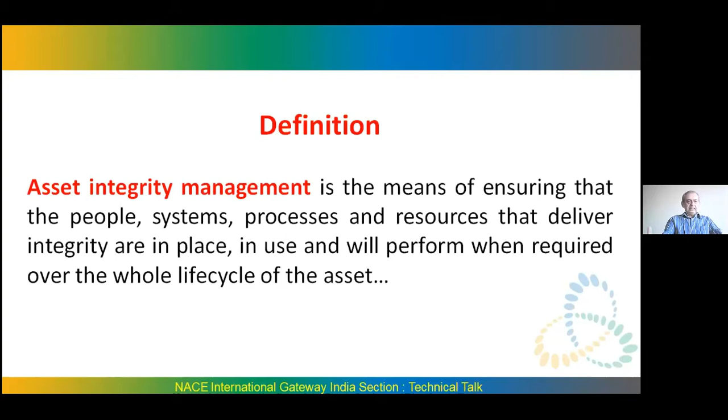Asset integrity has three constituents: design integrity, operational integrity, and technical integrity. What is design integrity? Design integrity is the basic conception of the asset, how the asset is going to be, what will be the capacity of the asset, what will be the metallurgy, what will be the protection, the HAZOP, HAZAN, HAZID, LOPA study, HIRA, then cathodic protection, corrosion protection. All those things are perceived and designed well, so that the asset performs its given role over its life cycle.

So I would say that a good design gives you a 60 to 70% guarantee that the asset is going to act as per the plan, as per the basic conception. And construction is also one aspect which I take in the design only, because it is the practical implementation of the conception which has been designed, which has been thought. So construction integrity, construction strictness, construction quality make a lot of impact on the asset integrity over its life cycle.

Let me introduce you to the regulation part in our country, how things are at the moment. This is a typical IMS, integrity management system regulation of the country for the city gas distribution system. So you can see various schedules from 1 to 9. It talks of

hardware aspects. In Schedule 10, care has been given to adequacy of manpower positioned at various stages of the project. So minimum qualification, experience, those things are prescribed, and with that backup of competence, the people are placed in those workstations, and they are supposed to perform their duties.

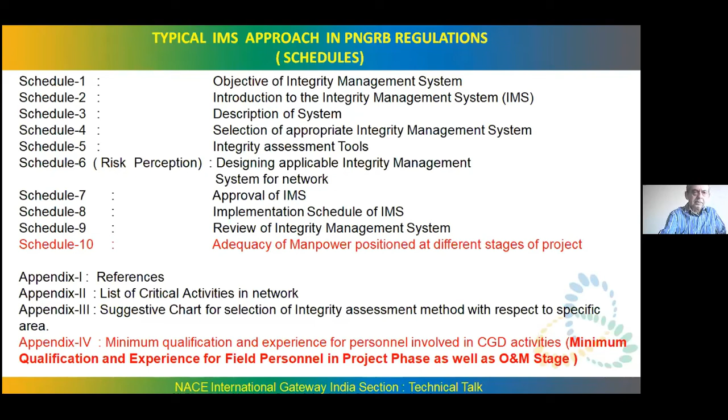Ultimately, the brass tack of the whole issue is the man behind the machine. The machine is given all the wherewithal to operate. But how are the machines getting operated, are they being used or abused? That is the thing which I am going to talk about today, basically.

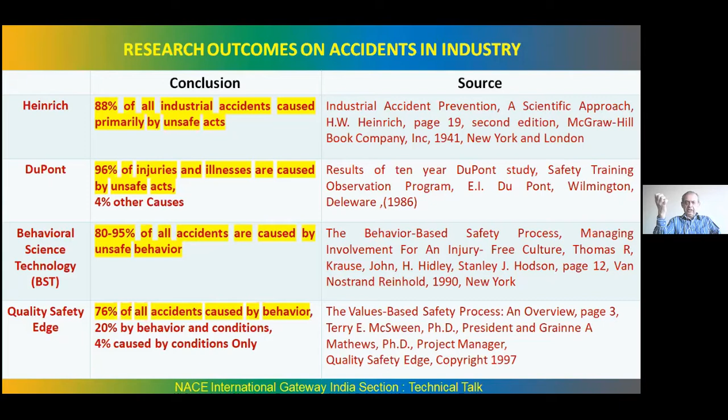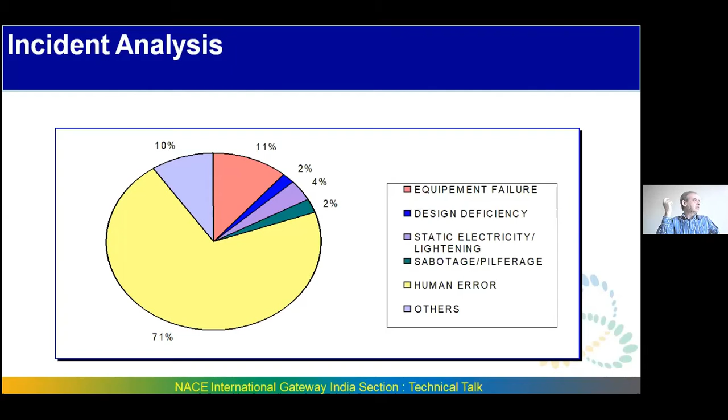This is the slide which I chose from my OISD days. It's a very self-explanatory slide. It talks of human errors by 71%, then equipment failure, design deficiency, static electricity, lightning, sabotage, pilferage, human error, others. So mostly the emphasis is on the human that operates the machine or that has to take care of the asset integrity assurance.

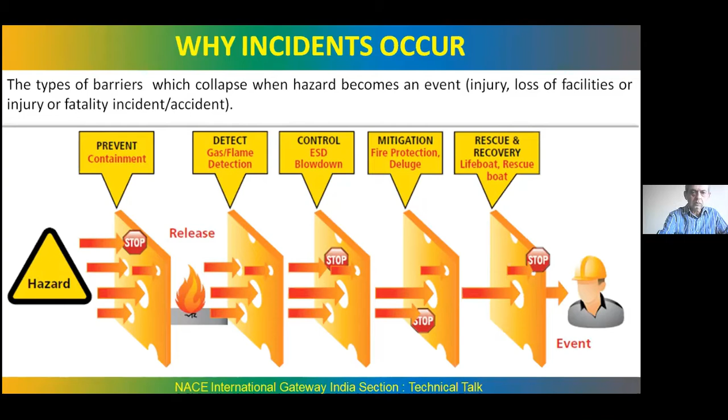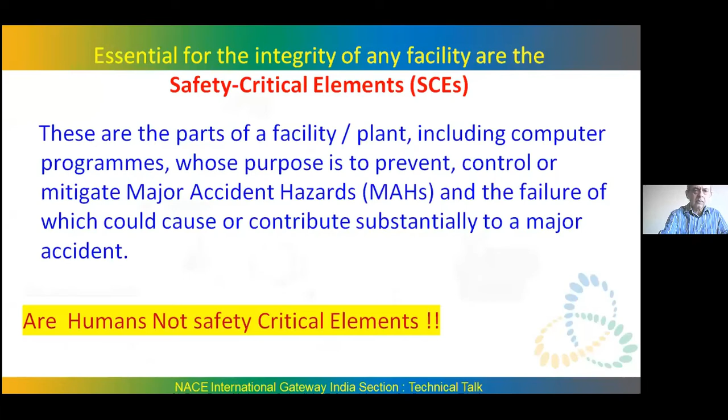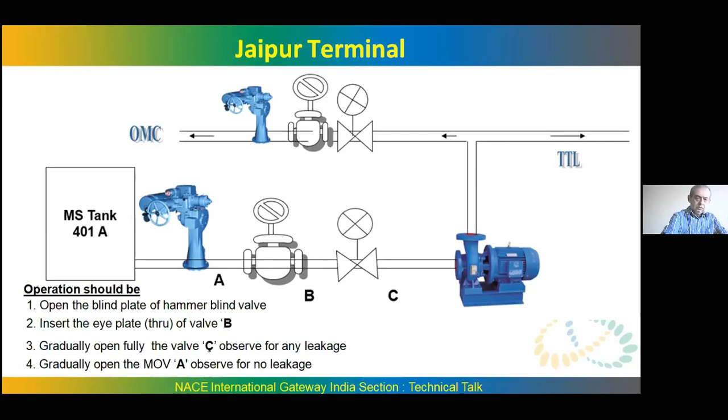What happened? Loss of primary containment of motor spirit means there was a leakage from the tank itself, with the vapor cloud going out of that area, that secondary containment. These are the barriers which I am talking about. These were the barriers created. Like I showed in the slide, the barriers are placed. So barriers start breaking. How were the barriers breaking? These are the explanation. Then incapacitated operating personnel, inadequate mitigation measures.

There was no water or PPEs or tools and tackles. People were going with the tools and tackles to do something, but there was a probability of some spark and explosion. So the situation was left as it is. Then approach of operating personnel became difficult due to rapid increase of vapor cloud, improper tools and tackles, fear of fire. The scenario went unabated, and after 45 minutes, there was a fire engulfing the whole depot.

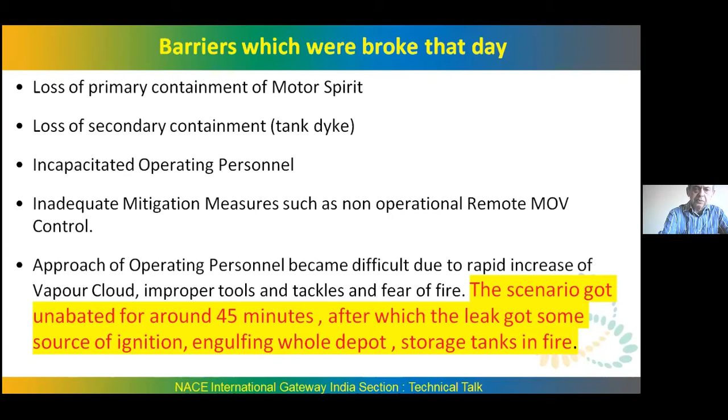Now this is the scenario of the plant. All floating roof tanks of the depot caught fire. There is a peculiar situation in a fuel depot that when the fire takes place, all the floating roof tanks catch fire simultaneously, because that seal area is a containment area. The vapor cloud tries to settle on that area. And the moment there is some ignition, some spark, some fire, all the tanks catch fire.

So fire spread to all tanks and raged for 11 days. Management had taken a considered decision to allow the petroleum product to burn, because whoever was going was unable to do anything practically because of the heat intensity. So product consumed was 60,000 KL. Total installation destroyed. 11 lives lost, and several others injured.

Collateral damage. There was a car dealer whose whole showroom was damaged. The pump house for the trunk crude pipeline was also damaged, and this handicap reduced the throughput of two major oil refineries. It took 18 months to rebuild the facilities on a war scale. The total loss was around $65 million.

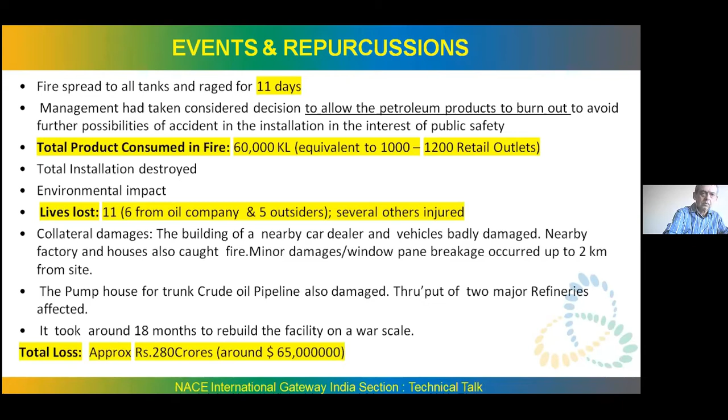In the beginning, there was a video shown on Piper Alpha, the Piper Alpha incident in which 167 casualties had taken place. What I am going to show is why it happened. What was the human intervention in the Piper Alpha incident? We only see the fire. But why does the fire occur as such? What is the basic cause? So I'm going to get you into a small video which shows what happened exactly in the Piper Alpha incident.

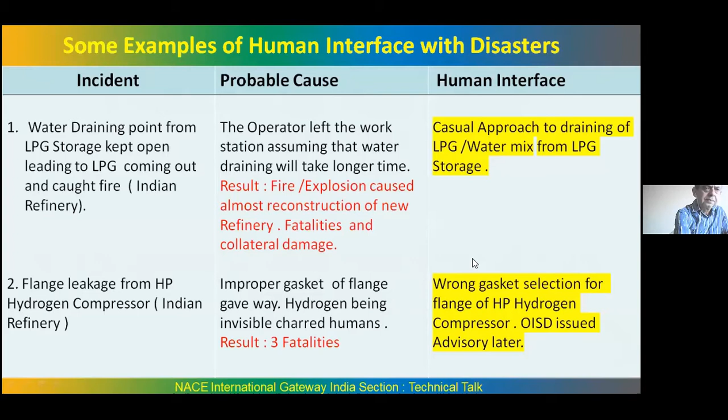So you can share the screen once again, because your video will be in the folder, I believe. So you can press escape. And you can go to the video. Yeah.

Immediately after the explosion of the Piper Alpha, it became imperative that the cause of the accident be uncovered quickly. Britain's oil production was dangerously reduced, and the chance of another rig suffering a similar disaster meant speed was of the essence. Working backwards, investigators began to trace the blast back to its point of origin. That's when failure analysis was called in.

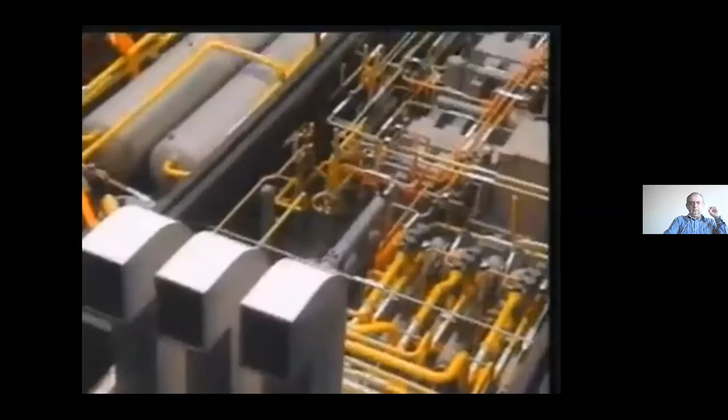We were called immediately after the disaster on Piper Alpha occurred, in part because of our extensive past experience in investigating accidents in the North Sea, in part because of our technology.

But immediately, the investigation took on a character of its own. And I wouldn't characterize any investigation of any part of the accident on Piper Alpha as easy, because let's face it, the next day, 30,000 tons of evidence were under 500 foot of water.

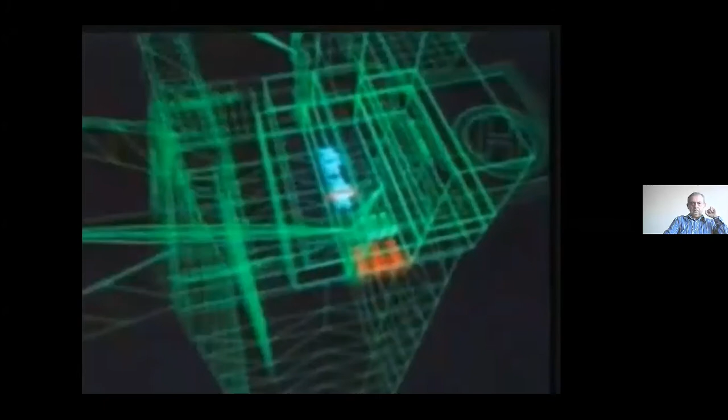Investigators had determined that the first explosion took place in what was known as Module C. The control room was located here, immediately above the explosion. It was destroyed instantly. Most of the crew were in their quarters located here. Tragically, the flames were between them and the lifeboats.

Though the area of the explosion had been isolated, the cause of the blast was still unknown. In order to zero in on the ignition point, eyewitness testimony had to be compared with the actual layout of the Piper Alpha. Rebuilding the rig would be impossible. But by using the original blueprints, failure analysis was able to reconstruct the Piper Alpha inside the computer.

What engineering animation permits is as close to time travel as mortals will ever get. We can travel back in time and stand on the platform as it existed the day before its destruction, even though it will never exist again. We can turn our heads, we can walk up stairways just as if the platform existed today, and everywhere we look, we see what we would have seen on that platform that day.

After months of painstaking reconstruction, using the computer animation and eyewitness accounts of the blast as a reference, investigators tracked the beginning of the problem to one of two pressure safety valves in Module C. These valves help to vent gas as a part of what is known as the process stream. The day of the explosion, it was being cleaned by a freelance contractor.

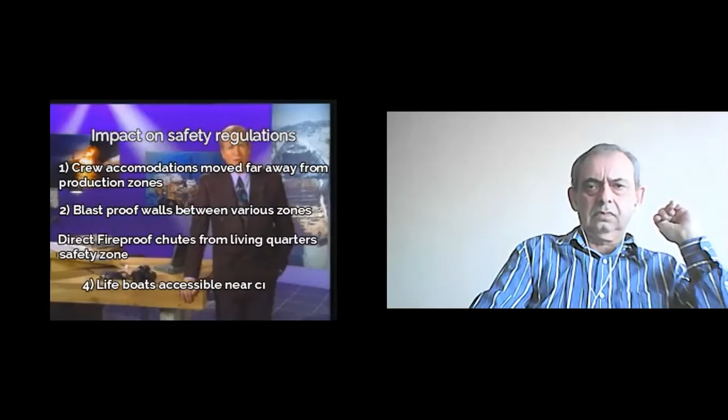That is one informative video, sir. Pretty much, I'm pretty sure the participants would have got an idea what exactly happened with the Piper Alpha. You can continue sharing your presentation, sir, and we have reached approximately, we are at 12 o'clock right now. So you may please keep the timing also in mind when you go ahead with the remaining of the presentation.

So, the human to human contact in the plant is a must. It should not so happen that a shift person who has done something important, that communication does not go to the next shift. This is the lesson which we learned from this particular instance.

The second, the depot video which I showed, we also have some certain lessons from that particular instance, and those lessons have been manifested in a new regulation known as OISD 244, which is made on the basis of one particular report, the M.B. Lal committee report, which gave so many suggestions, so many ideas, but the feasibility of those ideas, of those suggestions, were discussed across the whole oil and gas industry, and a new standard, Oil Industry Safety Directorate Standard 244, was created after that particular fire, which is available in the open market now.

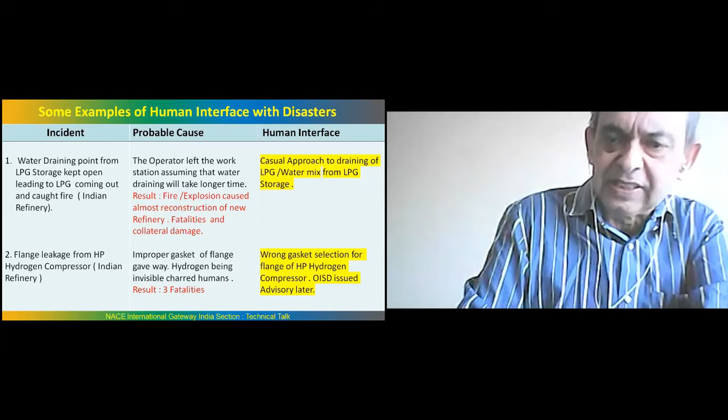In south of India, one particular gas pipe, which was getting gas from the supplier, got corroded one day. It gave way, and there was a huge explosion. That instance has been shown in the beginning of the video. I happened to be there three years after that incident, and I saw that 19 kilometers of section were going to be replaced.

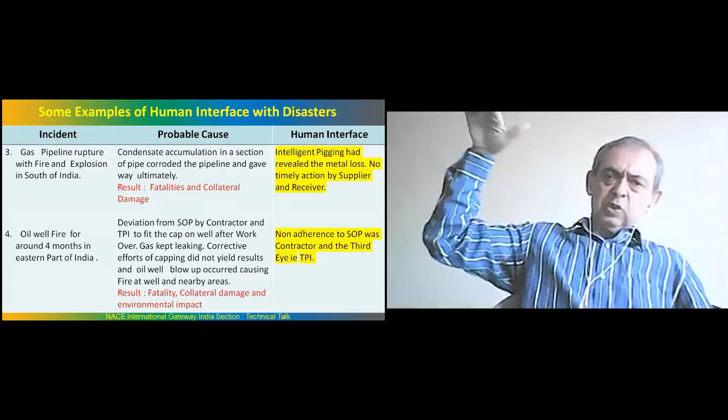Why was that 19 kilometers being replaced? Because at one particular point, the pipe rises and goes to the level of the Godavari railway bridge. So that gradient, up to the point from where the gas is received, was full of condensate. The gas supplier was not drying the gas; it was coming with condensate. The whole section was filled with condensate, which started eating away the pipe over time. Even intelligent pigging had given warnings, but they were not heeded. Ultimately, one day the pipe ruptured, and there was a huge fire causing fatalities and collateral damage.

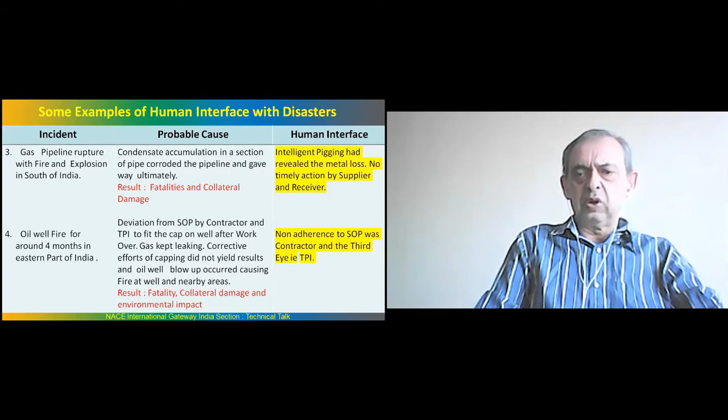We are also aware of an oil well fire in the eastern part of the country, which occurred after the workover was completed. The capping was to be done by a contractor with a third-party inspector, following proper protocol and standard operating practice, but that was not adhered to. Gas was leaking and could have been stopped, but a source of ignition appeared, causing a fire that raged for months. The role, competence, and criteria of third-party inspectors must be properly watched by the client, so that people without adequate knowledge of the subject are not put in place.

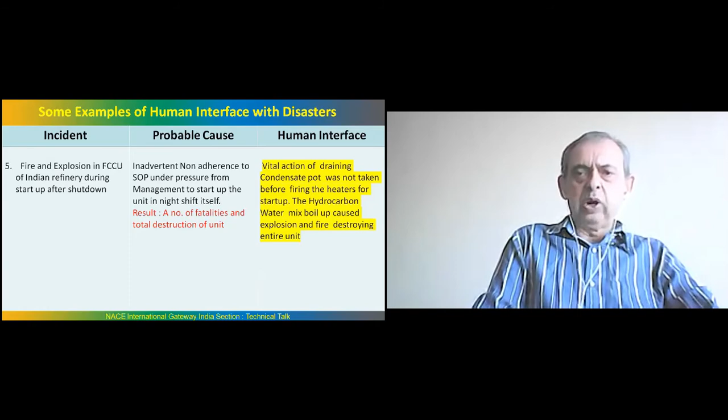One fire occurred in a fluidized catalytic cracker unit in one of the Indian refineries. It was under shutdown, and startup had to take place. There was so much pressure on the people to start it as early as possible. It was night shift, and the SOP clearly specified draining the condensate pot, because unless drained, water remains, and when this water mixes with boiling hydrocarbon, there is a boil out, a flash, and possible explosion. There have been such instances worldwide, but the operators, in a hurry to start the unit at night under pressure, did not drain the condensate pot, and there was a fire. The whole plant was destroyed and had to be rebuilt. A number of fatalities occurred, and some people died very difficult deaths.

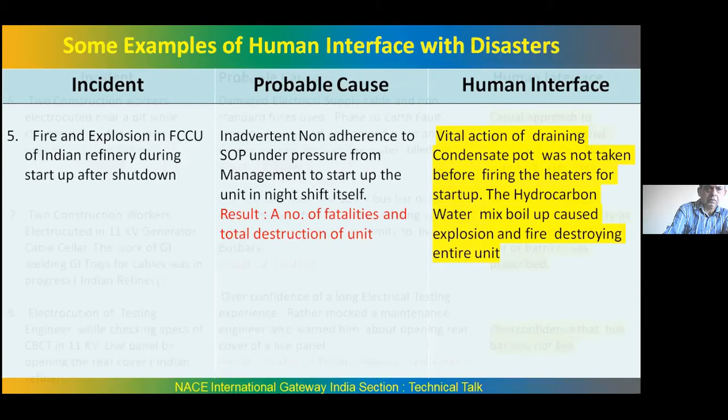These are some typical construction incidents which I happened to investigate. Can you believe that an earth wire can kill people? It cannot — it is supposed to protect people, not kill them. But this happened at one of the construction sites of Eastern Refinery, where a damaged electrical supply cable had been used along with non-standard fuses. There was a phase-to-earth fault in the cable that remained sustained and passed to the earth. That day, after rain the previous day, a pit was being cleared by casual workers. One of the strands of the earth wire was passing through that pit, and two people got shocked and died a very difficult death in front of many people who were merely watching, unable to do anything. Ultimately, the main supply was switched off, and that's how the cable was de-energized.

Another incident: two construction workers in a South Indian refinery were working near the 11 kV bus bar in the cable cellar, welding a GI tray on which the cables are placed. The work permit allowed work at that site in close proximity to the live 11 kV section, without proper sectionalizing or transferring the load to other generators. The section remained live, and the metallic fume from the welding created a tracking path to the live bus bar. One worker was electrocuted, and the other, trying to help extricate him, also died in the process.

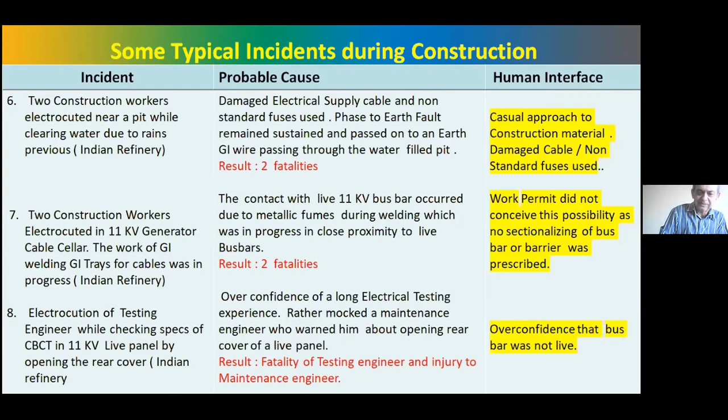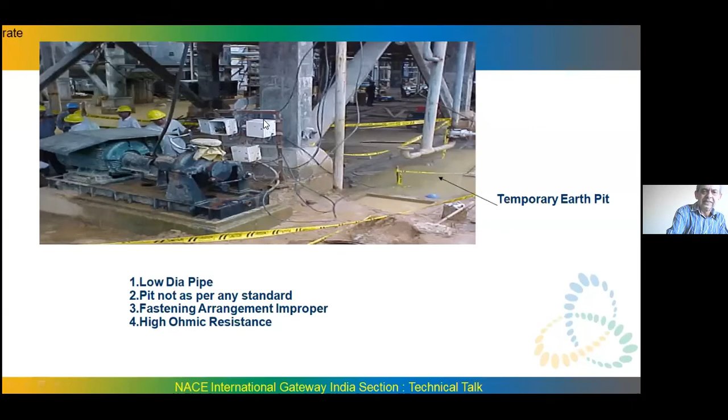These are some of the pictures. You see this. This is the earthing pit, temporary earthing pit created in the construction site. Low dia pipe, everything non-standard. This is the drain pit where those two people were working. So this entire poor earthing, poor earth pit pipe. This is the pit pipe, and this is the GI strip. How the contact is done, you can see.

One particular instance of a person working at a height of 100 feet above the ground, he was doing the grinding work. He got a shock and he died in that process. The earthing was totally poor, and nobody knew what to do, how to bring him down to the ground. There was no way that he could be resuscitated or given some treatment. He remained there for half an hour. By the time he was brought down by a snorkel lift, he was already dead.

In my life, I have come across 2 instances. I joined Indian Oil as a graduate engineer trainee with the confidence that I was the best. I knew everything, and I was full of overconfidence. I was put in the power plant shift operation. In one particular night shift, we were supposed to start a boiler, and I was given the task of taking the insulation value of one particular feed pump, which was a 6.6 kV feed pump.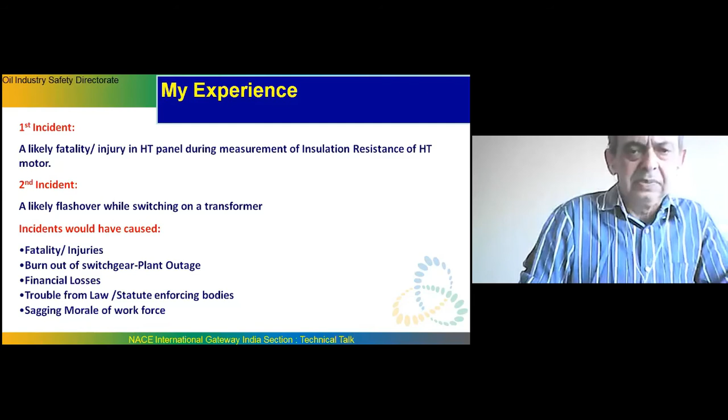I'm trying to highlight this instance to tell my younger friends that never ever bypass the standard operating practices. Never ever. However bothersome, pinching, or frustrating they are, do not bypass the standard operating practice.

He asked me, Mr. Sharma, you take the phasing properly. So I was not happy, but then boss was boss. So what I did, I did the phasing. R to R phase 400 volts, B to B phase 400 volts, and Y to Y phase 400 volts.

My whole... I just thought that I had stopped breathing. And it so happened that one of our operators had done something in the terminal box, and he had changed the phasing because one of the terminations was very tight.

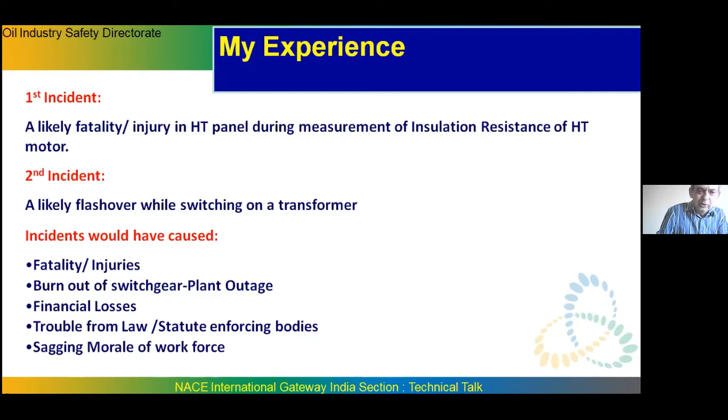So he unlocked the nuts and bolts and made it proper. But that was not conveyed to me. So this was again a case of miscommunication or no communication to the person who was going to do the switching on.

So the learning: better communication, follow all steps for de-energization of equipment to be worked on. I should have dragged out the breaker. I should have taken out the control fuses. Only then should I have opened the rear panel and done the measuring, but I didn't do it.

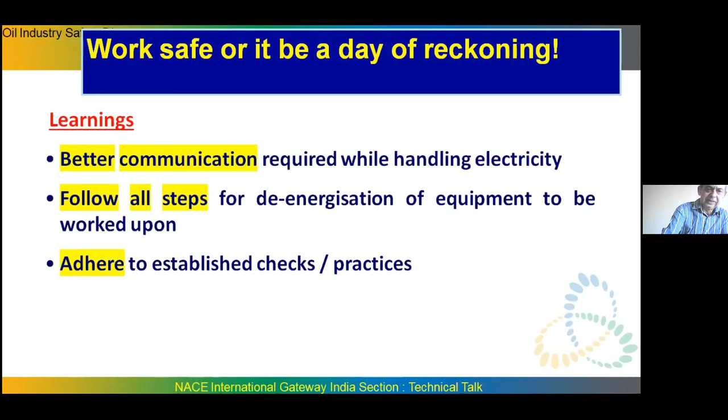Established checks and practices are to be adhered to at all times, because a lot of learning has gone into making those established checks and practices.

Third-party inspection in our country has now come in the form of the regulator PNGRB, Petroleum and Natural Gas Regulatory Board, along with the NABCB, National Accreditation Board for Certification Bodies. They are empaneling, accrediting the third parties for certain regulations formed by PNGRB. And I'm going to take 5 minutes on the competence and processes being followed by third parties in our country.

The process is like this. The NABCB, National Accreditation Board for Certification Bodies... this ISO is basically for inspection of inspecting bodies. So the entity has to have A-type status for getting an empanelment with PNGRB. What is A-type status? It has to be purely an inspecting body. It cannot be doing any other activity.

B-type is where there can be an inspection setup in the hierarchy, but it will render inspection only to its own organization. And C-type is free to render inspection to its own organization as well as outside. But a C-type body will not be called a third-party inspector. PNGRB empanels only A-type third-party inspection bodies. It has nothing to do with B or C-type.

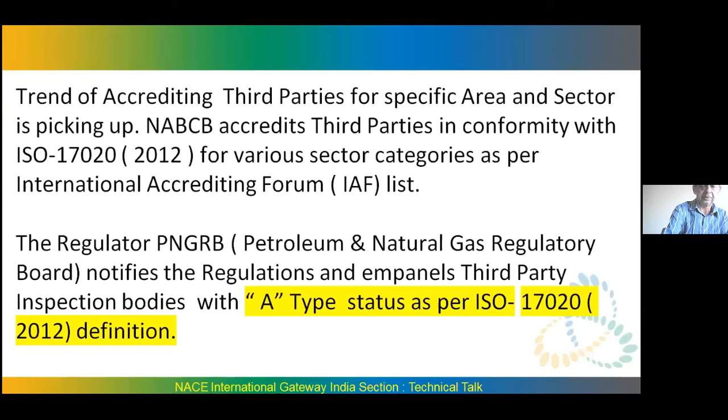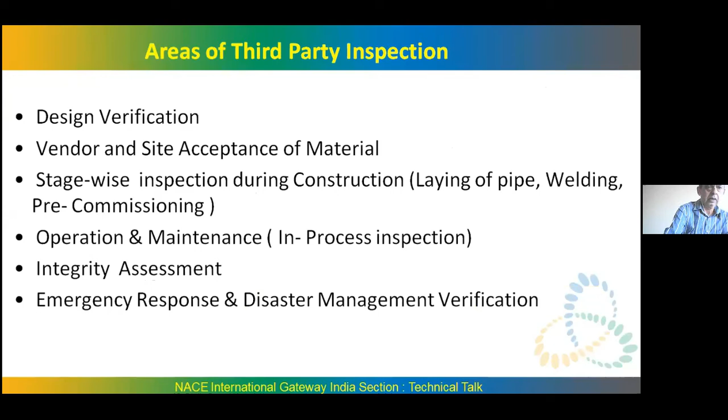These inspection bodies are doing design verification, vendor site acceptance, these kinds of things; our third parties are engaged at the moment in the oil and gas sector. These are the regulations which have been formed. You will see that T4S has been put before all the regulations. In the regulation there are 4 S's: standard, specification, safety, and one more S. So each regulation is called T4S.

Like there is T4S for NG pipeline, T4S for city gas distribution, etc. So in these regulations, except for the last one for retail outlets, third-party inspection is there. Now, third-party inspection has 2 facets. One is during the construction, and the other is auditing when the construction is over. Auditing is also done by third party.

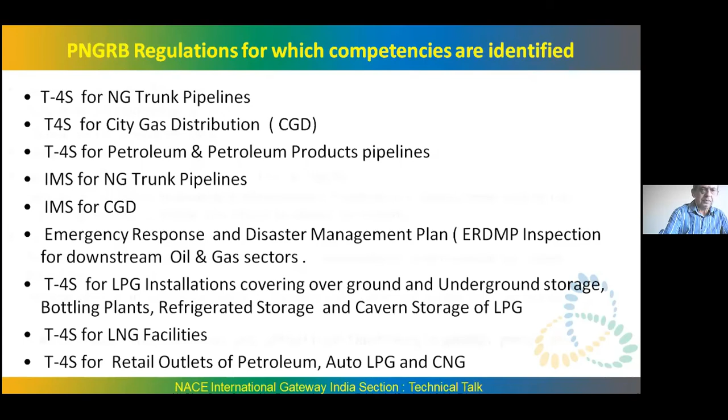In the construction, these are the schedules of a typical T4S regulation, and all these schedules are critical from a third-party inspection perspective. Competence and process issues of third-party inspection: everybody will appreciate that the competencies of the auditor have to be one notch above the competencies of field personnel. Otherwise, this will not be a third-party inspection.

The majority of third parties are private bodies, and there are problems. The auditing skills don't commensurate with knowledge of regulations. Undue pressure from clients also takes place. In one particular instance, I saw that the hydro test timing was cut short to start the commissioning process immediately. And the job criterion is L1: the lowest bidder gets the job, and at times there are problems with the quality of the lowest bidder.

And one more issue of concern is that for construction there is no PNGRB empanelment. Though NABCB does the accreditation, PNGRB has not accepted construction third-party inspection so far. So any third-party inspection body, which may or may not have ISO 17020, is engaged in construction in the oil and gas sector. And construction, as I said in the beginning, a poor construction is a fait accompli for the people who are working, operating, and maintaining the system.

Now, sectoral competence. I'll talk of ERDMP, Emergency Response and Disaster Management Plan, where the auditor must have sectoral competence. There are about 10 downstream areas in the PNGRB regulations, starting from the refinery up to the retail outlets, LNG, LPG pipeline, NG pipeline, city gas distribution system. All these downstream sectors have to undergo emergency response and disaster management plan verification by a third party as per the regulation ERDMP 2010.

Now, a third party which approaches NABCB for ERDMP accreditation must have expertise in the particular sector in which they want to do the inspection. It cannot happen that a third party which is good in pipelines is also good in refineries, or a party which is good in retail outlets is good for cross-country pipelines. So a sectoral categorization has to be done. We in NABCB are in the process of creating that sectoral competence, and in future the accreditation will be given as per that competence only.

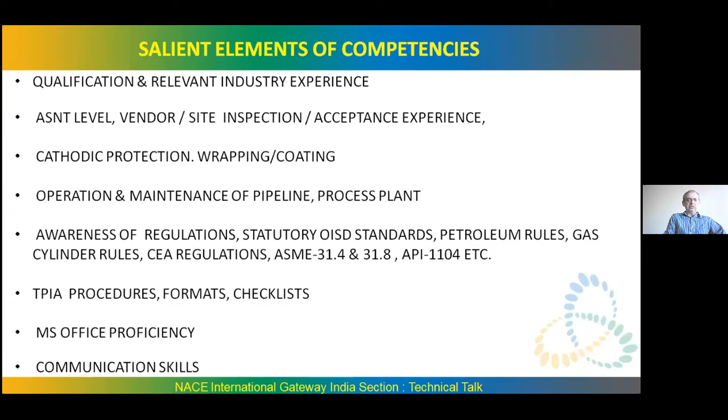These are the elements of the competence which we have created in NABCB: qualification, relevant industrial experience, ASNT level, vendor, site inspection, inspection acceptance, cathodic protection, operation and maintenance of pipeline, process plant, awareness of regulation, TPIA procedures, MS Office proficiency, communication skills, like that. We have defined and created a procedure wherein the TPIs are able to evaluate their inspectors and accordingly authorize. So attempts are being made to raise the level of third-party inspection in the country.

It is not that everything is bleak and not good, but we are picking up, and in future things will be looking much brighter. But for the time being, we have to carry on with raising the level of competence of our people seriously and with a lot of intent.

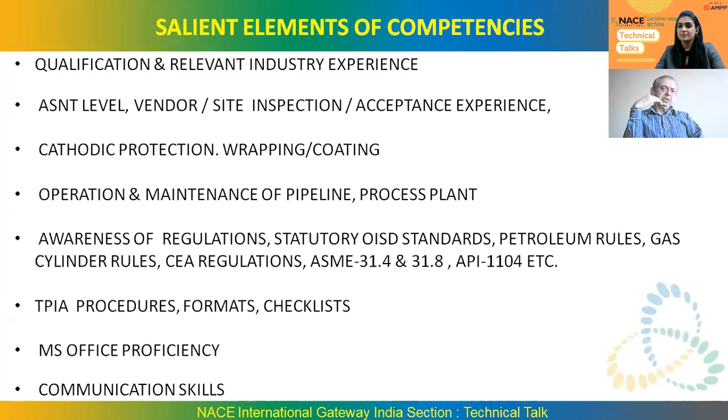Competence criteria, I repeat this, there is no competence criteria for third parties during construction. At the moment, there is no such criteria made. A criteria is made for auditing, when the plant starts working. For the audits, the criteria are there, and PNGRB also empanels those bodies only for audits, not for construction. Then surprise inspections by the regulator and the accreditation body for evaluation.

We had discussed it many times that we must carry out surprise inspections, because on the day of the ISO assessment, the IB, the inspecting body, puts its best foot forward. The accreditation body is impressed, and at times they get the ISO 17020 accreditation, but later on complaints start coming to the accreditation body, even to the regulator, for poor work being done by these people.

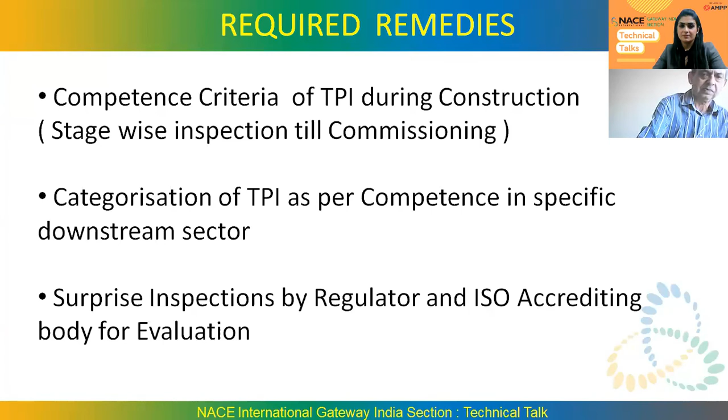So at the fag end, I can say that any failure is an opportunity to begin again more intelligently. We should not commit the same error twice. That is not acceptable. To err is human, it is an adage, but the error cannot be twice or thrice. That is not like a human being, because humans are intelligent. They are able to understand. They are able to learn from failure. A man can fail many times, but it's not a failure until he begins to blame. So there is no blame. We are basically what we practice in life, and we are responsible for what we are.

But as far as de-energization and energization is concerned, we have a LOTO system in place. We have learned a lot from work permit system failures, in which more than 2 or 3 agencies are working on the same equipment, and there are incidences where one agency has finished the task and another agency is working, and the equipment is started. This happened in one refinery, and 2 persons died. So, detection systems throughout the life cycle are a challenge the industry faces, and after an incident, response for electrical isolation is key.